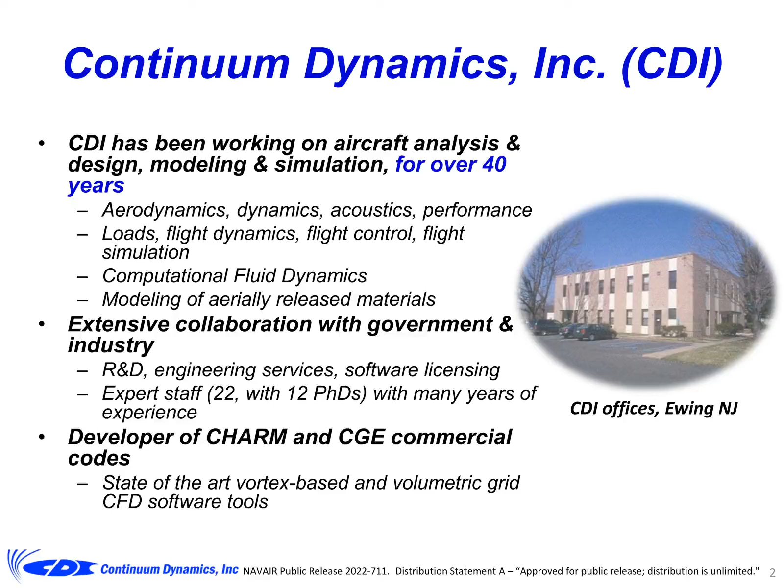CDI's contributed engineering, design, and analysis solutions in the aerospace, mechanical, and nuclear engineering fields since its inception in the late 70s. Our Navy effort here leverages this past experience with current Army-funded experimental work to further expand our particle modeling to support chaff countermeasure release simulation.

The Navy desires to protect their aviation assets through continuous improvement in systems and methods for countering adversary threats that have ever-expanding capabilities. These improvements include gaining better understanding of the details associated with countermeasure release, such as transient behavior of chaff fibers following aircraft release and operational flight profiles that may include evasive maneuvers.

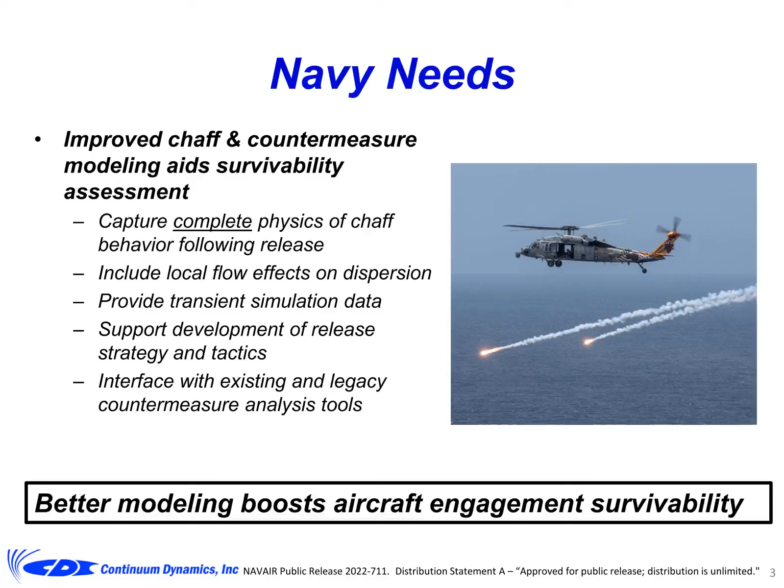Local flow effects on chaff immediately upon release can establish initial conditions on subsequent dispersion behavior that can lead to significantly different far-field signature properties. Thus, proper physical modeling of this interaction is crucial to a better understanding of the transient nature of the resulting countermeasure effectiveness and can support development of alternative release strategy and tactics for improved survivability. To appreciate how this improvement is possible, we have to first characterize the existing modeling technology available in this realm.

Current chaff countermeasure models will typically represent the dispersion process using simple spatial growth models and data-driven transient growth rates extracted from actual release tests. The software used with these legacy models will incorporate static or steady-state aircraft wake flow fields that represent cruising flight conditions and thus have no transient modeling capability.

The actual chaff cloud evolution is a dynamic process that responds to both changing aircraft wake structure and aircraft maneuvers, and thus can be influenced by flight parameters in its time evolution. But in order to simulate this behavior, one needs an accurate and validated flow field model that can drive the physics concerning the dispersion of chaff fibers following release.

Several flow field domains govern the chaff cloud dynamics and include the near field regime, where the local shear flow dominates the initial behavior immediately upon release, a midfield zone near the aircraft where local vortices further modify the dispersion shape and cloud propagation, and a far field volume where local winds and the rolled up aircraft vortex pair are the primary flow field effects.

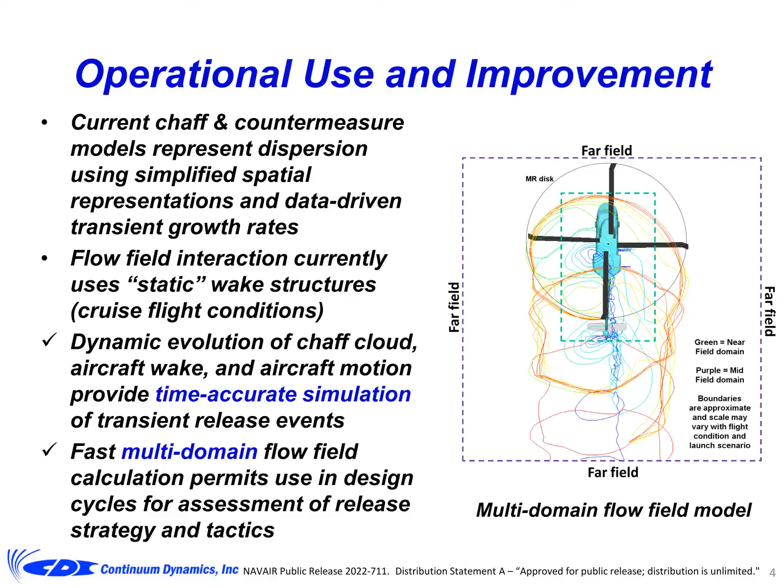The integration of these transient flow fields with the chaff countermeasures transient response has been coded into the countermeasures toolbox for MATLAB, described next. The countermeasures toolbox is a MATLAB-based software tool for modeling dynamic chaff release for maneuvering fixed and rotary wing aircraft. The toolbox includes CDI's CHARM free wake vortex model. CHARM is an acronym for Comprehensive Hierarchical Aeromechanics Rotorcraft Model.

That represents the flow field from these maneuvering aircraft and performs a time-marching simulation of the chaff fiber dispersion from initial release through cloud expansion to settling in the far-field environment. Simulation data can be used for quick look analysis of signatures for the chaff cloud and the aircraft as part of the toolbox software, or it can be shared with existing DoD signature analysis software tools.

The MATLAB environment allows for ease of problem setup and graphical visualization of simulation results, but the physics engine for computing the dispersion behavior can be exported for integration into other DoD countermeasures simulation assets. Aircraft model data needed for the wake calculation are lifting surface or rotor geometry, a simple vehicle panelization, and a nominal gross weight. Many models of current DoD aircraft are included in the toolbox.

Aircraft flight profiles can be generated from a combination of parameterized maneuvers, from custom MATLAB functions operating on simulation data, or from actual flight test telemetry data for reconstruction of a test scenario.

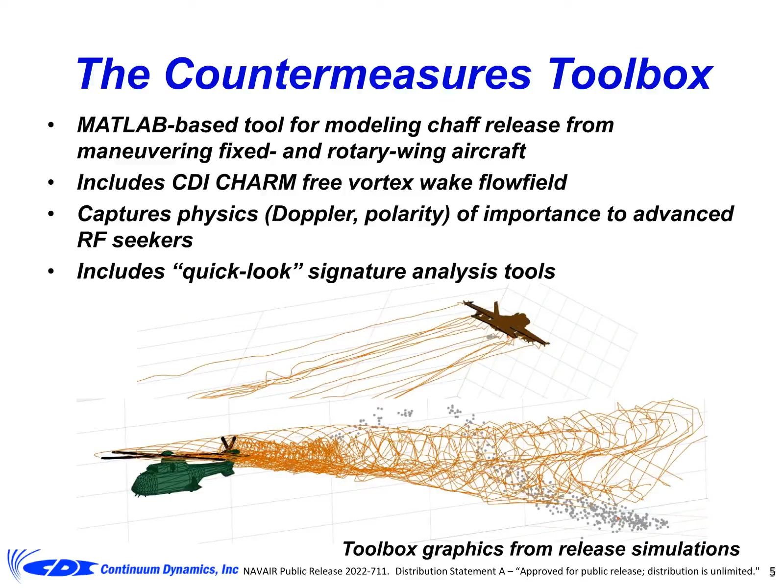Signature analysis for a quick look assessment can be formed for both stationary and independently moving reference frames, such as on a seeker. This toolbox greatly extends the Navy's modeling capability for survivability analysis and can directly impact development and improvement of strategy and tactics in response to adversary engagements.

The current Phase 2.5 software development effort is a 36-month program with 18-month base and option phases, and is now just starting the option phase. Initial baseline software delivery had the goal of collecting user feedback and generating interface documentation for use with DoD software assets. Navy Crane is the primary interface user, with additional support from NavAir.

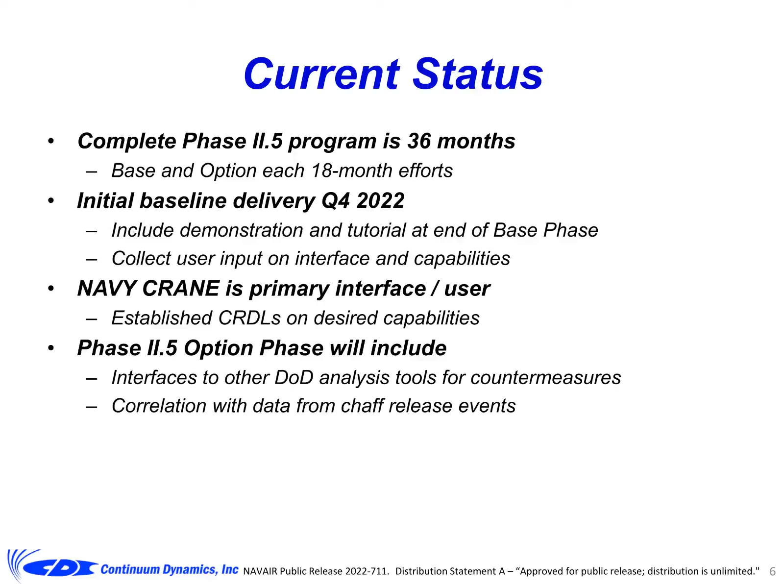The capability to model transient behavior is available for both the current Navy tools and the countermeasure toolbox, but the present Navy tools are limited to only calculating transient chaff cloud dispersion versus the toolbox capability for calculating a transient flow field during release.

Flow field models for the statistical analysis typically just use ambient wind profiles, whereas time-marching Navy simulation tools presently incorporate aircraft flow fields for cruise flight conditions only. The countermeasure toolbox, however, can represent detailed flow conditions across several domains and capture transient maneuvering flight profiles for that maneuvering aircraft.

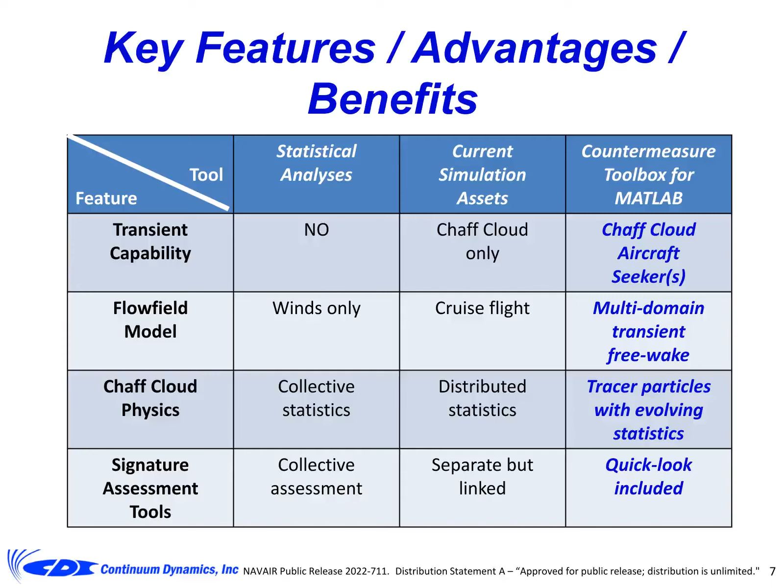And finally, while the purely statistical models include some form of collective signature representation, the current Navy tools use a separate software suite for the signature analysis of the release event. The countermeasure toolbox provides some quick look analysis tools that help determine sensitivities of simulation parameters to computed signature, thereby allowing for iterative adjustment of flight profiles and release sequencing prior to export of the dataset to existing validated DoD signature software assets.

So how do we transfer this software to the fleet? As mentioned, Navy Crane is the initial and primary user of this asset, as the development cycles are structured to iterate with their evaluation, testing, and integration activities with other DoD software tools. The CHARM flow field model may also be extended for integration with other existing Navy countermeasures tools for those users that do not wish to run the toolbox in a standalone mode.

Further, model improvement will incorporate chaff release data from a separate Army contract to CDI, where controlled release behavior is recorded for a range of different onset and vortex flow environments. Extensions are underway to include additional models for thermal countermeasures such as flares and pyrophorics within the toolbox. And using companion flow analysis tools, future applications can include countermeasure release modeling for surface ships.

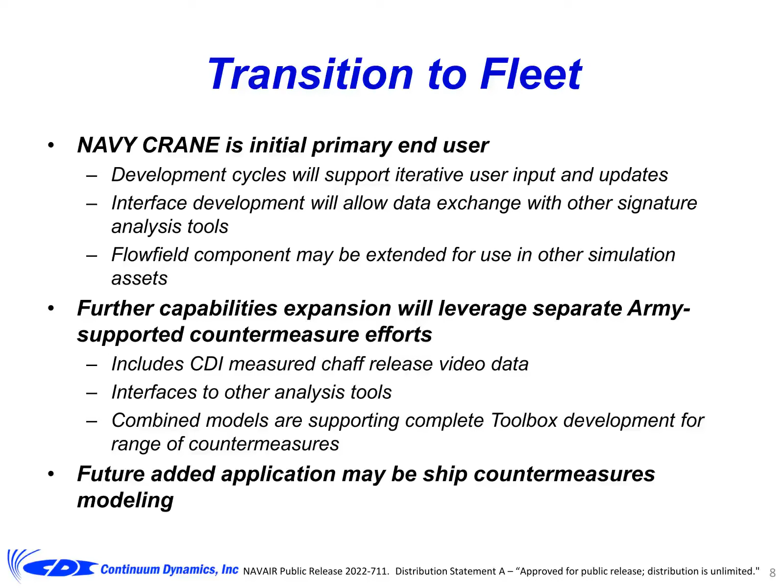The overall goal of the effort described here is to make the countermeasures toolbox a DoD-wide modeling tool that can simulate a variety of countermeasure releases from multiple aircraft platforms for all services. Portions of the codebase may also be exported for use in existing DoD simulation tools to enhance the existing physics models for the countermeasures response and to replace the representation of the aircraft flow field with one capable of including aircraft transit and dynamic maneuvers.

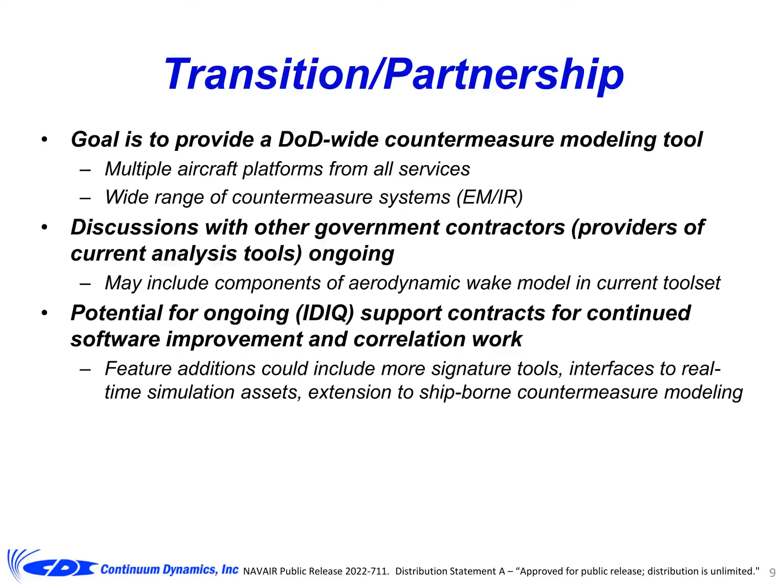The potential exists for ongoing support through an IDIQ contract to expand the quick look signature analysis capability, provide support for surface ship countermeasure modeling, and operate in real time to support manned simulation engagement scenarios. I encourage you to consider how this improved countermeasure modeling tool can support your mission to enhance Navy survivability, and humbly ask that you contact us directly to discuss how we might help you.